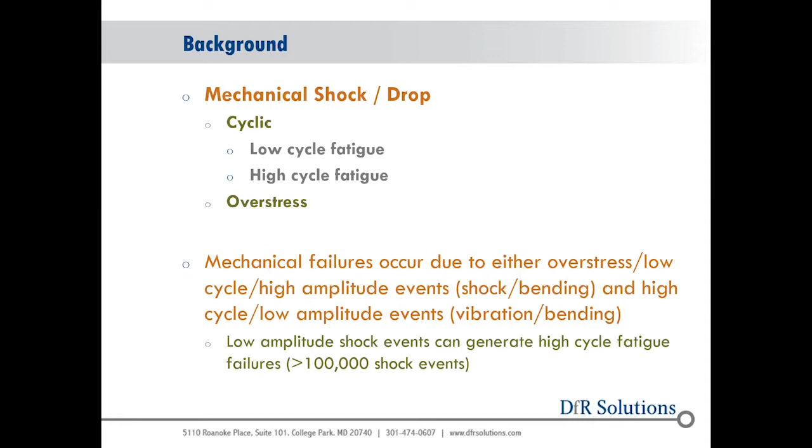So low amplitude events, we want to see elastic type of deformations, and then we're talking about getting into high cycle fatigue, so like 100,000 or more events.

As I said, anytime we hit the yield stress of the solder joints, even the yield stress of the copper leads or any other metals on the circuit board, there's a good chance we're going to break something.

One of the things about electronics is that a lot of the fracture strengths of the materials are all very similar. So ceramic capacitors crack usually between 30 and 60 megapascals, maybe 80 megapascals.

Pad cratering is around the same type of stress level. And then the yield stress of the solder is actually 30 to 50 megapascals. So you can imagine, as soon as I start yielding a solder joint, there's a good chance I'm going to break something.

So low cycle fatigue of the metals usually is going to be the Coffin-Manson equation. And really we're looking at events that occur 100 to 10,000 cycles.

Once you get below 100, it's really - is it an overstress, or, it really gets very difficult to predict very low cycles of failure if it's a bending type of event.

So we're using the Coffin-Manson equation, which is an inelastic strain range. And then for high cycle fatigue, we're using a Basquin equation, which could be elastic strain or stress, because those are directly proportional when we're elastic.

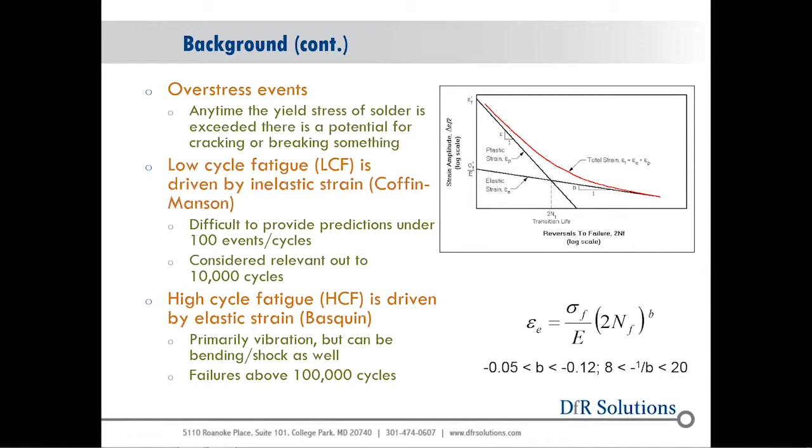Why is it advantageous to do simulations? It's really to catch problems before they're identified in validation and production. So we're trying to identify design issues at the conceptual and design phase, where we can add additional mount points,

we can make the board thicker, we can add stiffeners, we can change component selections, and it really is easy for us to do that earlier, and it's actually a lot cheaper.

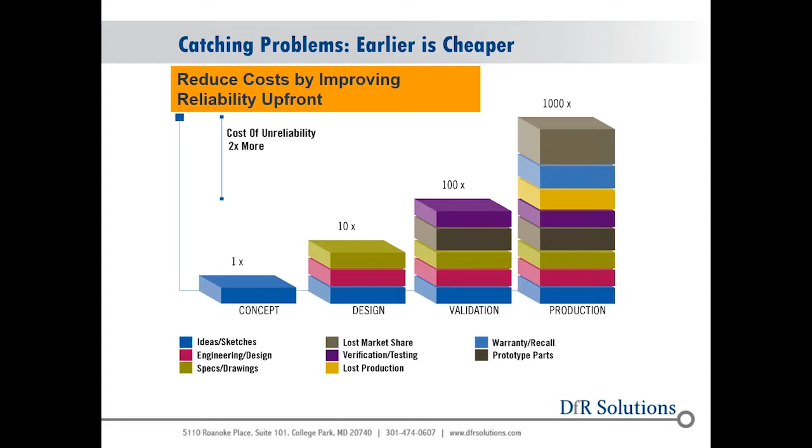So as the product goes through the development cycle, the cost of making design changes or fixing issues becomes very expensive.

The levels of testing for mechanical shock - there's component level testing. These are usually on the loose packages, and typically it would be for the old school hermetic type ceramic packages, where a...

lot of sort of low volume hand soldering type of operations where the part may be dropped, and we're talking about the individual electronic component, and maybe something could get shaken loose inside the part. So really not for most standard overmolded packages.

Component level drop tests are usually not applicable. There has been some indication that dropping tantalum capacitors could have some issues even in the overmolded state.

So then we have assembled package level testing. This is really component package qualification type of testing. This is coupon level testing,

where I solder a new package onto a test coupon. I subject it to a very high shock level, typically 1500 Gs, half milliseconds, really for cell phone types of environments. And then we get to subassembly and assembly level types of drop testing.

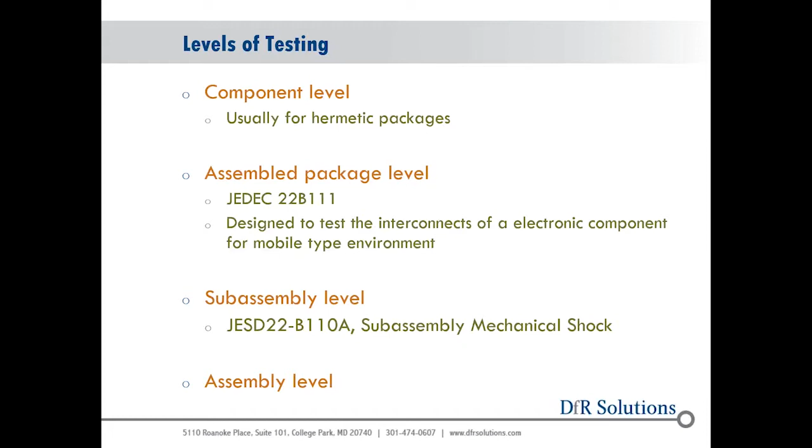When we're talking about overstress, it really is - I mean, yes, you can break the component package, but really it's going to be the interconnect structure. This could be pretty much what's on either side of the solder joint itself.

They're very difficult to predict an overstress failure because it really is a high strain rate type of event, crack propagation through a very brittle material for the most part. And typically we see it as a random failure distribution.

So, if we're at overstress type of levels, the probability of failure on the first drop would be the same as the 100th drop, so a random sort of failure distribution.

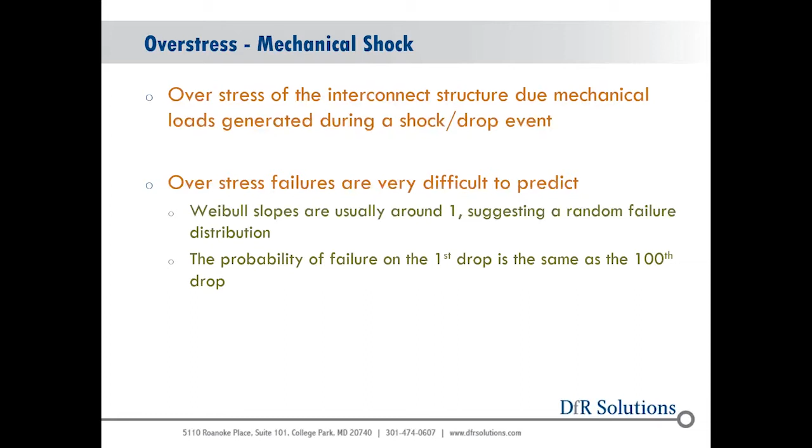When you look at Weibull data for shock drops to failure, the beta is usually 1, which indicates sort of random failure. When we're talking classic mechanical shock simulations, this is usually what comes to mind would be cell phone drop simulation. The key thing is to determine what is the actual loads being applied to the circuit board inside here.

This is sort of where, and it really was with the mobile phone market, when free fall drop test simulations came into vogue, where people started doing a lot of them. But the key thing is, what is it actually doing to the circuit board inside there?

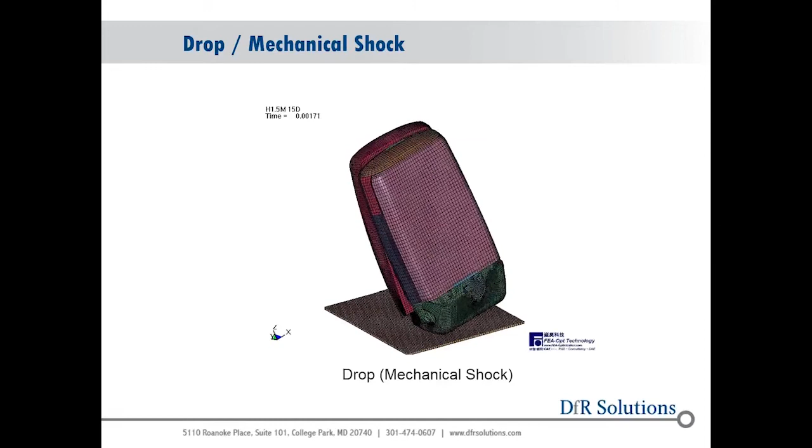We have to remember that mechanical shock events can occur at multiple points during the assembly process or post-assembly. It could be after soldering, or in ICT, in circuit test, where you have a bunch of pogo pins that are pneumatically actuated that push down on the board very rapidly, providing a lot of force onto the board. It could be heatsink attachment, connector insertion, depaneling. We see a lot of bending, or it's not a drop, but it is a very rapid application of mechanical stress, and that can cause failures of the electronics.

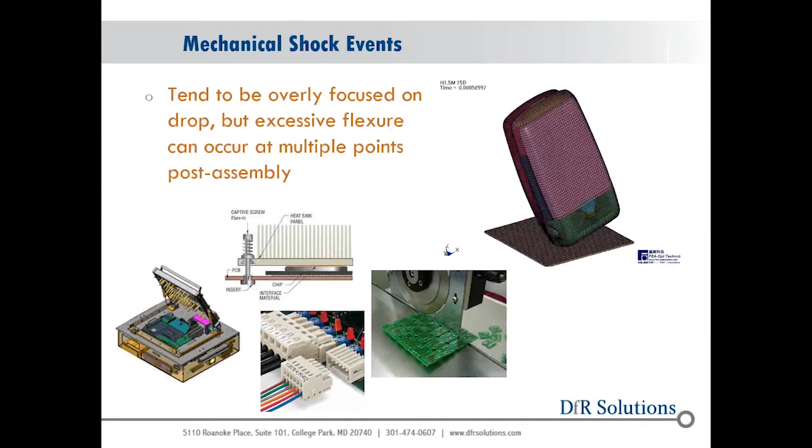Another thing that is very similar to mechanical shock is just excessive flexure. Everybody's sort of making a big deal about bending of cell phones and things like that. So what we're seeing is there's been a lot of 4-point bend testing, to test to make sure the packages are robust with regards to mechanical shock, because it's a very high strain rate 4-point bend test.

And then we also see more adoption of what we call a 9-point bend test. We have 8 spherical supports and then a center point. Again, all mostly for mobile phones or mobile electronics.

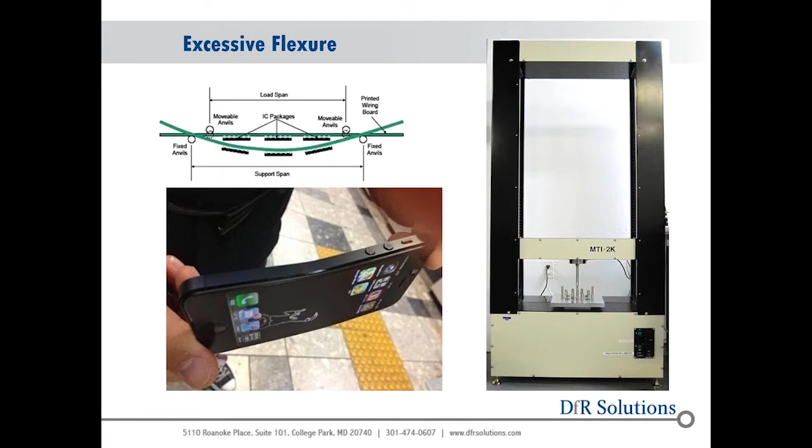But classic mechanical shock was due to shipping and transportation. It's things going onto trucks, being dropped by the UPS guy, kicked around. But we're also seeing mechanical shock due to, in portable medical devices, or really anything that's sort of roller-mounted test equipment. What we saw were fairly decent shock levels developed when they went over thresholds - floor transitions, cable covers, going into an elevator that's not quite aligned. You could get a 1-inch drop fairly easily going over a cable cover, and that could result in failures or heat sinks shaking loose.

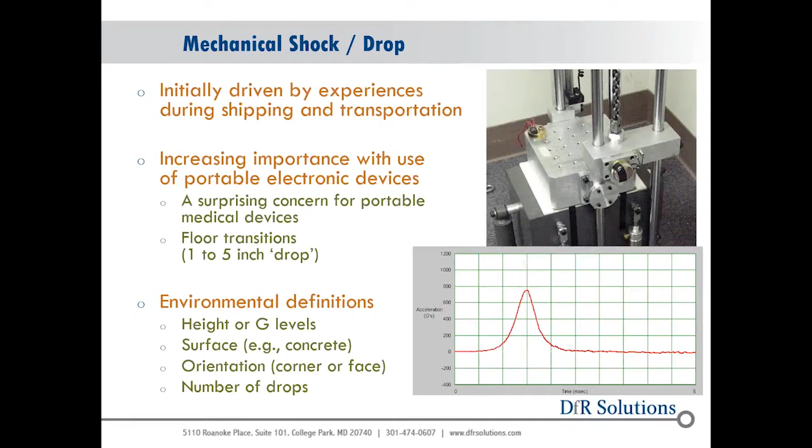Environmental definitions usually include height or G level, what type of surface, orientation of the drop, and the number of drops that needs to survive.

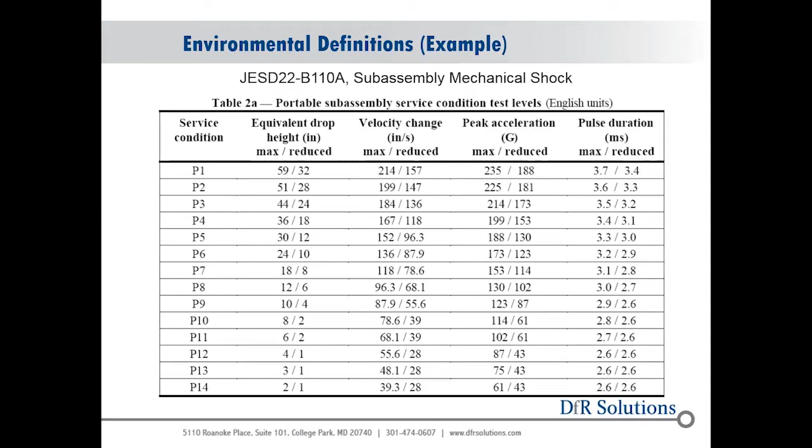Just an example of some of the specs for test service condition test levels from JESD 22B110. Really, it's equivalent drop height, what's the peak acceleration, and what's the pulse duration. These are all things - peak acceleration and pulse duration are easily translated into a load, something I can actually figure out. But telling me I'm going to drop this from 44 inches, what's the equivalent G level? It really depends on what the housing is, what it's attached to, how the board's attached, what it's hitting. So really, when you come down to mechanical shock specs, I like to see acceleration and time because I know how to simulate those.

Typically, what we're looking at, a good example is BGAs, really would be probably the most common component that shows shock-related failure.

Most of these parts, it really isn't the mass of the component itself - yes, it can be if there's a big heat sink on it, but usually it's board bending. We don't really care about the mass of the part. If I shock the component in plane, the package wants to move with respect to the PCB sort of in a shear direction, there's a lot of solder attached, so really in the shear direction we don't really see any issues. It really is more of a bending event when you get a peeling stress at the corners, which exerts a large tensile load on the solder joint, which can cause it to fracture at the brittle interfaces.

When we're looking at the brittle interfaces, we're not talking about failures in the solder ball itself. We're talking about fractures at the intermetallics, which are on both the package and the PCB side, and we're talking about pad cratering - pulling out, actually breaking the epoxy where the copper is attached to the board. Those are overstress types of conditions, and you wouldn't expect to see those at 100,000 types of events. You're going to see these very low cycle, large acceleration type of events, and you're going to cause a brittle fracture where a crack can propagate very quickly through these brittle materials and cause a failure.

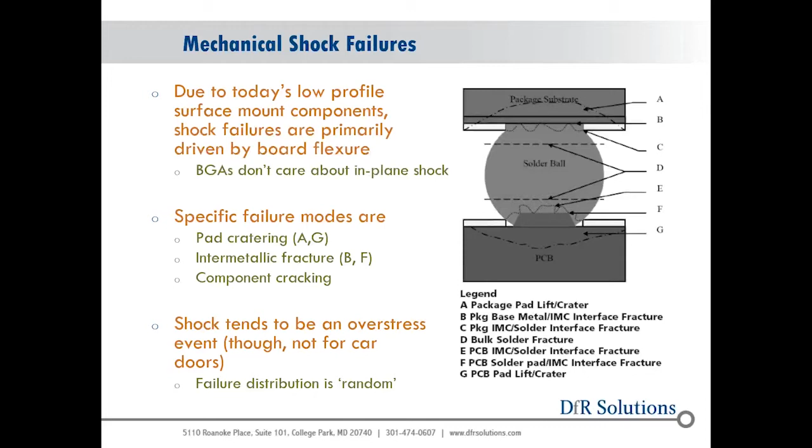What do they look like? So we have an intermetallic fracture here on the top. You can see the crack. Now intermetallics are normal. They're how the solder bonds to the printed circuit board, or to the copper. In this case, looks like we have a nickel layer up here, and we have a copper intermetallic down here.

So this would be a tin nickel intermetallic on the top, a tin copper intermetallic on the bottom. The intermetallics themselves are fairly stiff, high modulus with respect to the solder, and very brittle. So under an overstress condition, they're not going to plastically deform. You're going to get a brittle crack, and it's just going to propagate very quickly through that interface.

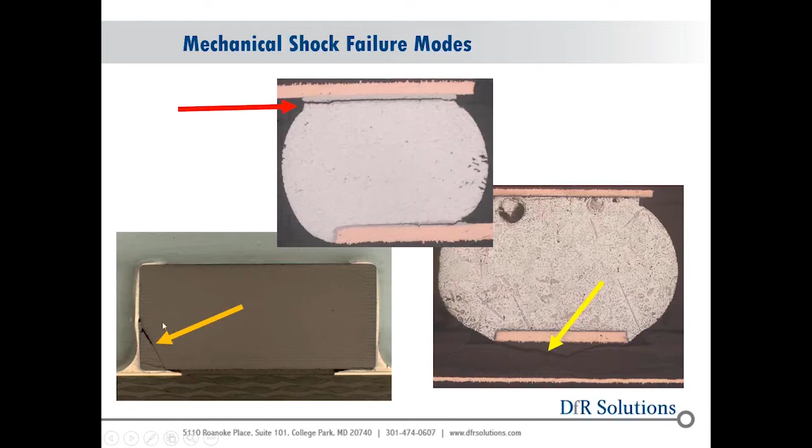Same thing down here. Really, stress is a function of cross-sectional area. So when I have a very small copper pad, and I'm pulling this part, I'm going to have a very large tensile stress in my circuit board, and I can actually pull the circuit board apart underneath the copper. Ceramic capacitor cracking here is just an example of a board bending event due to shock that cracked a ceramic cap.

Just definitions of pad cratering. It's crack initiation within the laminate during a mechanical event, such as ICT, and we talked about board depanelization, connector insertion, shock and drop. So that's pretty much the definition of a pad crater.

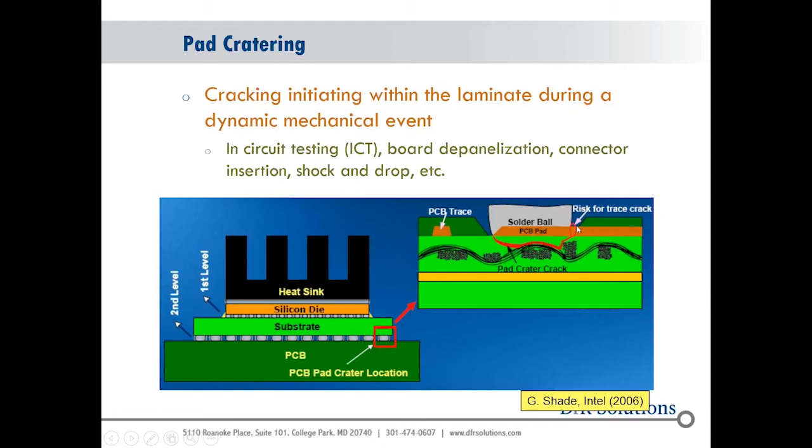The thing about pad cratering is it's one of these failures that you may not see during electrical test. What will happen is if the trace doesn't crack here, this is still electrically functional. So what you're doing is letting escapes into the field where there's not much holding that solder joint onto the board except for a very small portion of copper, which could break under a little bit more mechanical load.

Just some more pictures of it. We also saw a little bit of an uptick in pad cratering when we went to lead-free because of the stiffer solder, and a lot of the laminates, we had to go with higher glass transition temperature laminates. They tended to be a little bit more brittle than the typical laminates we were using before.

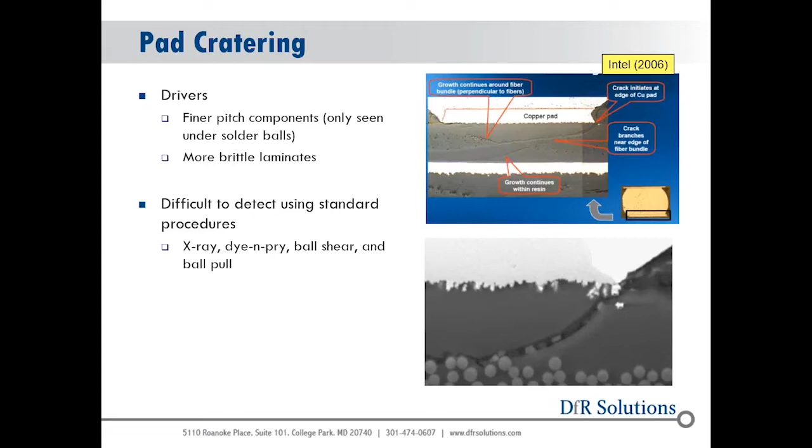And it really is very difficult to detect. As I said, it's very hard to see it with an X-ray. Really, to pick it up, you're going to have to do dye and pry or some destructive technique in order to determine whether or not you have pad cratering occurring. Usually what happens is you have an electrical failure after some assembly process or some drop event, and you go into destructive analysis right away.

Some of the solutions, it may be using a different type of laminate, so doing some type of testing on the laminates themselves, doing design changes on the pads, making the copper pads larger, and using solder mask defined. That would, there's kind of a trade-off there. If you make the copper pad bigger, you're spreading the stress out or the force out over a larger area and reducing the stress. But by going to solder mask defined, you're actually increasing the stress on the intermetallic. So there's kind of a trade-off. The thing is they break around the same stress values.

So when you do a drop test or shock test, you'll see mixed mode. You'll see intermetallic fractures. You'll see bond pad cratering sort of all mixed together. But really what we're looking at for sort of mitigation of pad cratering is limiting the amount of strain on your board during assembly.

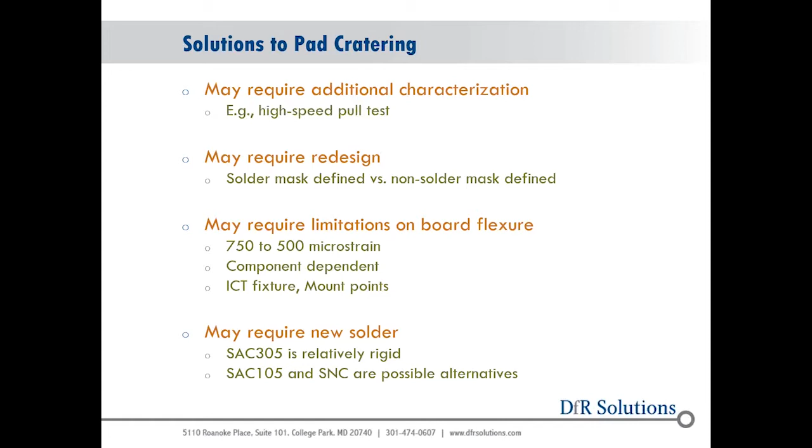During ICT, you may have to add mount points. You may consider going to a different solder, but my opinion is that if I have a shock problem with SAC 305, yes, switching to a SAC 105 or an SNC or SN100 or a SAC M may get me a little bit of margin, but I still have a problem, and I'm still going to have failures. There's just not enough. Yeah, there's a little bit, but there's just not enough to eliminate the issue. It may be a combination of solder changes with additional mounting to mitigate it.

Intermetallic fractures, it's a fracture through the intermetallic. They're typically an overstress. We wouldn't really see this during low cycle or high cycle fatigue. What we see with high cycle and low cycle fatigue are cracks in the bulk of the solder.

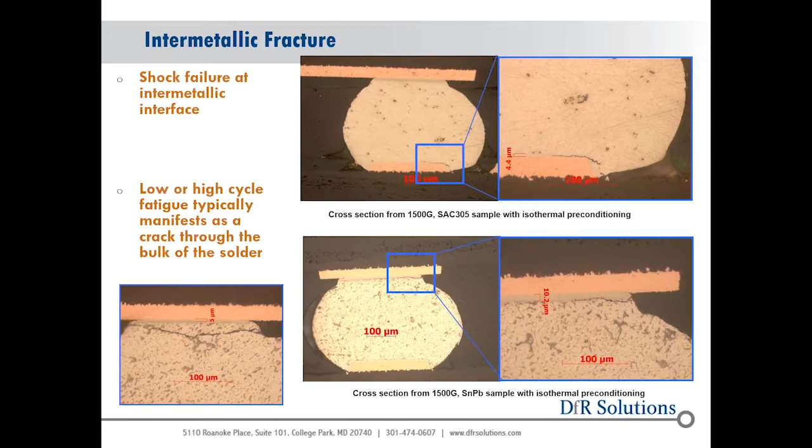So if you start to see cracks like this in the intermetallic on a unit, and you try to convince yourself that this is vibration or low cycle fatigue, chances are it's not. It's somebody dropped the unit or did something to it.

And the intermetallics are there all the time. They're irreversible. They're a function of how the solder is held together to the copper. It occurs rapidly during reflow, but it still grows as the solder joint ages. And just some guidelines on how thick it should be.

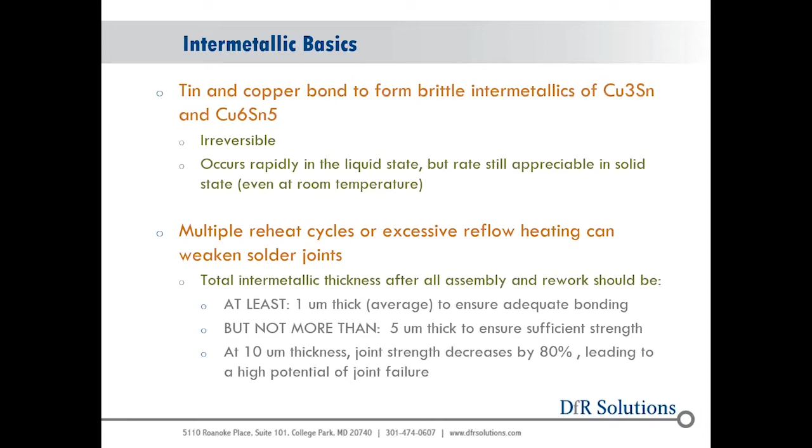As the intermetallic layer gets thicker, if you look at this chart or these pictures of tin copper intermetallic growth, imagine a crack propagating through the intermetallic in the lower left corner. As it propagates, it's going to hit ductile solder regions and get arrested, having to work its way through the plastic material before it hits the brittle material again. That slows it down and makes it more robust. But as I grow that layer thicker, I get a very uniform intermetallic structure where the crack can just zip right through it and break. That's one theory, in fact one of my colleagues at the University of Maryland came up with it.

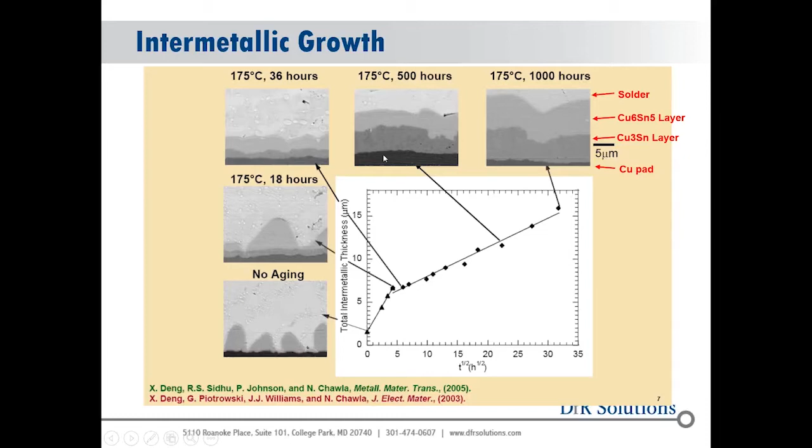Now, why is there such a large difference in strength between a very thick intermetallic versus one that's spiky, like a mountain range? The crack cannot propagate without hitting a ductile material.

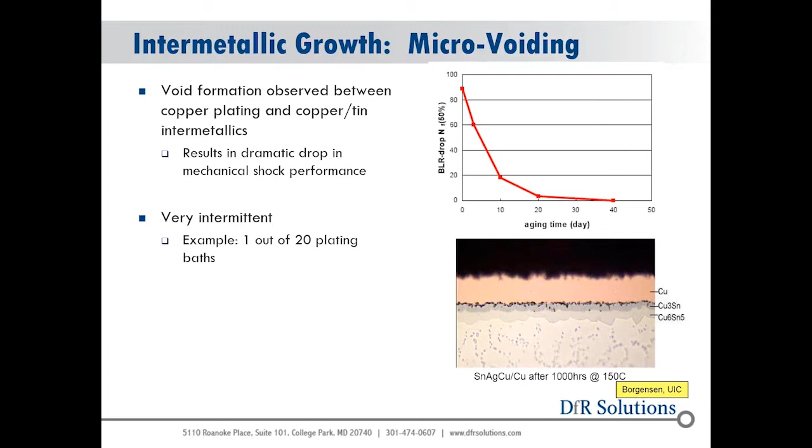Another issue that can reduce strength during shock is Kirkendall voiding or microvoiding. Kirkendall voiding is due to excessive intermetallic growth. This type of microvoiding is more of an effect of organic contaminants in the copper plating solution, and they've pretty much figured out how to get rid of that.

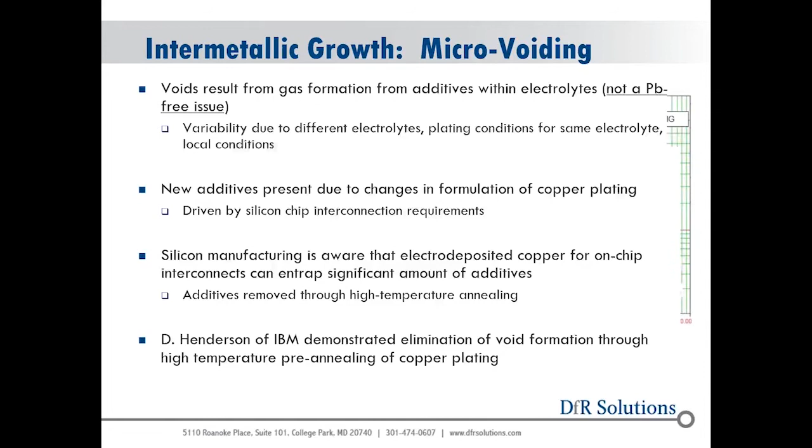Not something we've seen recently, but during the lead-free transition, people were looking for reasons why lead-free boards were failing. They did cross-sectioning and saw these microvoids, but then they did cross-sectioning on tin-lead product and saw the same microvoids, so it wasn't really a function of lead-free. But again, any type of voids at the interface or in the intermetallics reduces the cross-sectional area of the attach and increases the stress, which can cause earlier failures during the shock event.

As I was saying earlier, there's tin copper intermetallics and tin nickel intermetallics. Electroless nickel immersion gold, ENIG, is the gold finish on your boards, just a very thin layer of gold over nickel. The standard intermetallic form for that would be tin nickel. For other board finishes, such as OSP, immersion tin, immersion silver, or HASL, you're going to be forming copper tin intermetallics.

As we can see on this chart on the right, the number of drops to failure for the copper tin intermetallics is quite significantly higher. So if you're going into a high shock level environment, you may be better off going with the OSP or HASL type of finish because you're getting a stronger intermetallic.

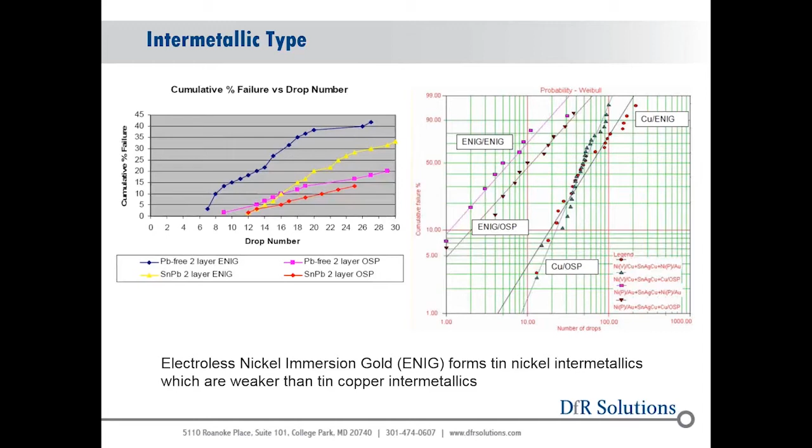The other thing though is ENIG is really good for elevated temperature applications, because at higher temperatures the tin nickel intermetallic grows quite a bit slower than the tin copper intermetallic, so it's usually better for high temperature applications. There are things you have to consider about all the different board finishes and how they impact the shock robustness of the product.

Definitely a thing of concern with lead-free is that it's a stiffer solder. It puts more stress on the interconnects, therefore it has a weaker result, its number of drops to failure is typically lower. This is a good example: you have the yellow line, which is tin-lead, and then your standard SAC305 here on the left. There's a significant reduction in drops to failure because of intermetallic fracture and pad cratering.

Because the yield stress of SAC is much higher, the solder doesn't deform and absorb the stress.

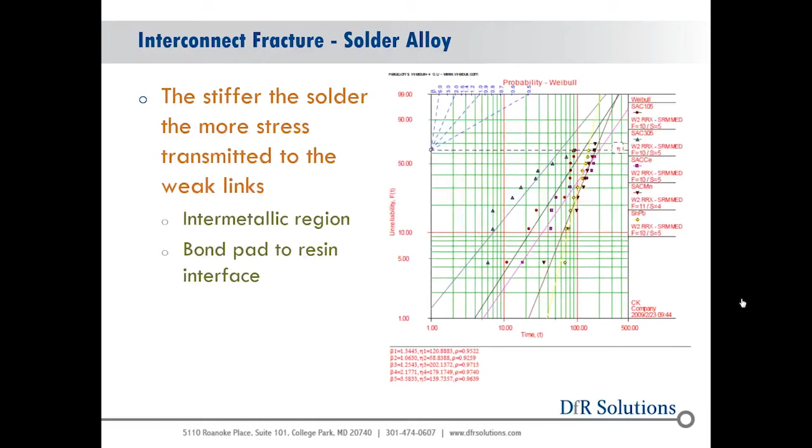How to mitigate for pad cratering or intermetallic fracture during shock. We talked about, and we'll go into some simulation later on, the effect of mount points and board thickness. Here we're looking at things I can do outside the design itself, like corner staking, edge bonding, underfill, and how they affect shock robustness.

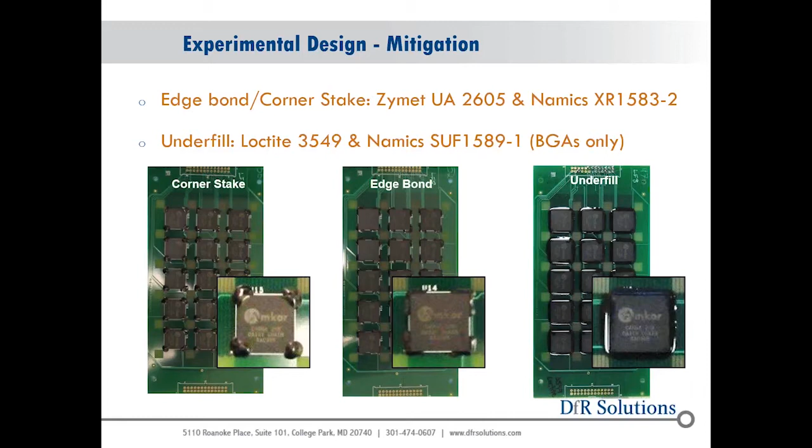These are cases where, hey, I've got an existing board, I can't do anything about mounting, I can't really change the form factor of the circuit board. Is there something I can do if I've got a part that's failing, to prevent that? Just some different loading conditions.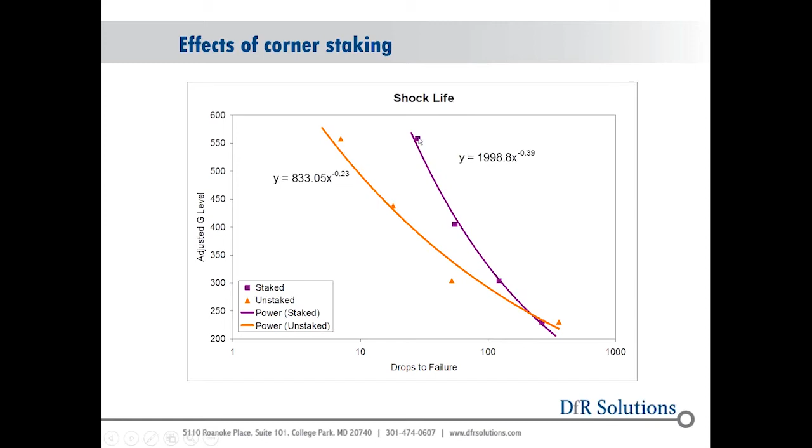We're starting to get into low cycle fatigue type of action above 100 cycles, but definitely time to first failure improved. And really, is somebody going to drop it more than 10 times? Hopefully not. But adding a little bit of staking will get you a little bit of margin.

When we go to a larger volume of staking, these are those 3 coupons I showed. We have our tin lead, which is the green line. We have some lead-free SAC 305, SN100, and then we have 2 different corner stakes, a UA 2605 and a 1583. So yes, there's a function of the corner staking material. But you can see all these now are very close.

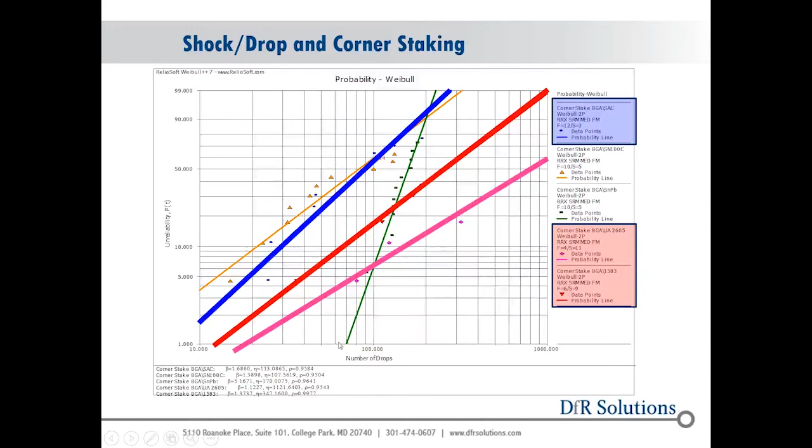Looks like there was one early failure here on the red, but definitely purple - there's only 3 failures. In fact, you can see there's quite a bit of number of suspensions here. So definitely the corner staking had a significant impact on drops to failure here, where we were getting drops within 20 cycles. Now we're starting to get drops 70 to 100 before we see the first failure.

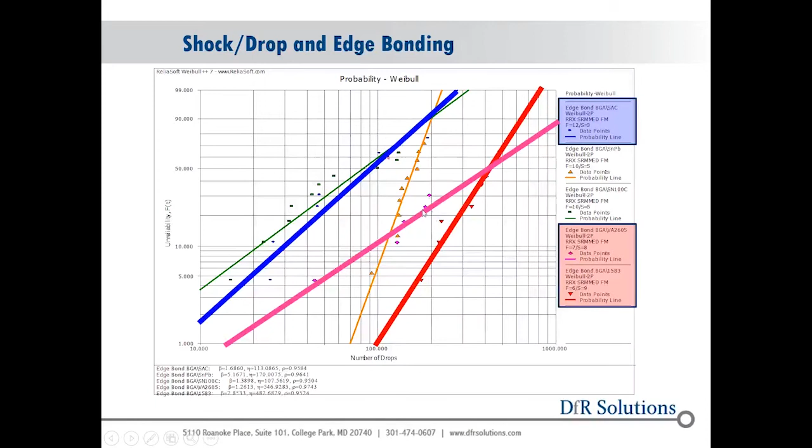Adding a little bit more epoxy, call it doing an edge bond, which is doing a sort of an L around the corner - again, now you're seeing more of an effect. Is that the 1583? Okay, the 1583 is actually performing better than the tin lead. This material probably needs to be a little bit harder, it's probably still a little bit too soft, but it's still performing better. But now when we get to underfill, we have 0 failures for the underfill device.

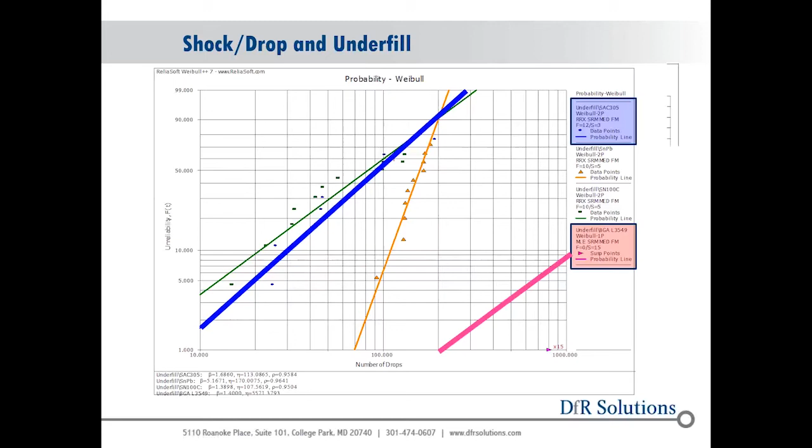So you can see just a huge impact using underfill. Now, underfill is great for vibration and mechanical shock, but you have to make sure when you're selecting an underfill, especially, typically what we're seeing is if I'm putting my product into an environment that has high shock levels and high vibration levels, it probably also has high temperature changes or thermal cycling criteria. So you just have to make sure that whatever underfill you pick, and to some extent this goes to edge bonding and the corner stakes also, you want to make sure that that underfill or staking compound is compatible with the temperature ranges that you're using and doesn't actually cause a problem when it comes to thermal cycling.

When we get to simulation and prediction of mechanical shock failures, we're going to start with the old school technique using Steinberg methodology for predicting number of shocks and drops to failure. Really, it was more of a go, no-go type criteria, based on displacements, which when you think about it really makes sense, because as soon as I get into a low cycle fatigue type of behavior with a shock event, there's a good chance that I'm going to break something due to overstress, because the yield stress of solder is close to the breaking stress for a lot of these materials. So I like the go, no-go approach.

But this is an older technique and really is based on displacement, and we know that surface mount components are really more sensitive to strain or bending of the circuit board. So this is an example - this is IPC 9704, which had a strain. How fast was the strain being applied, and then the board thickness, and what's the permissible strain that I could subject that component to, mostly for BGAs.

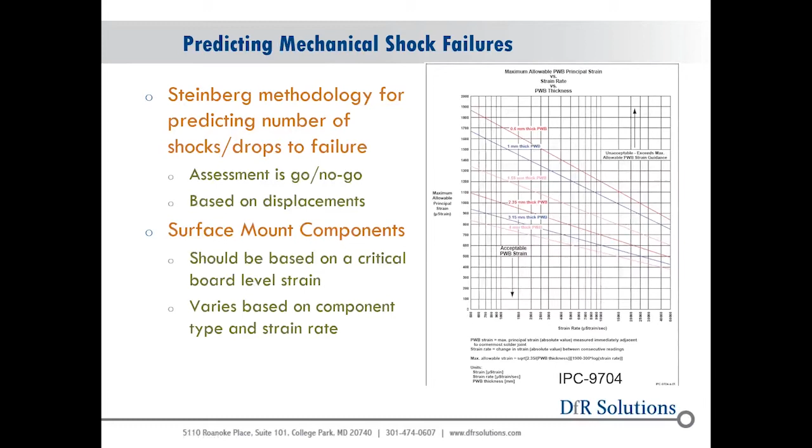So if we look at the prediction for Steinberg for shock, now it's not straightforward. It is a fairly complex calculation, because you have to predict - you compute out the Z, I should put some subscripts on here. There's a Z critical, that is the critical displacement which I don't want to exceed, because if I exceed it, I'm going to have a failure. And it was just an empirical equation that I'm showing here: 0.00132 times the board length, a component factor.

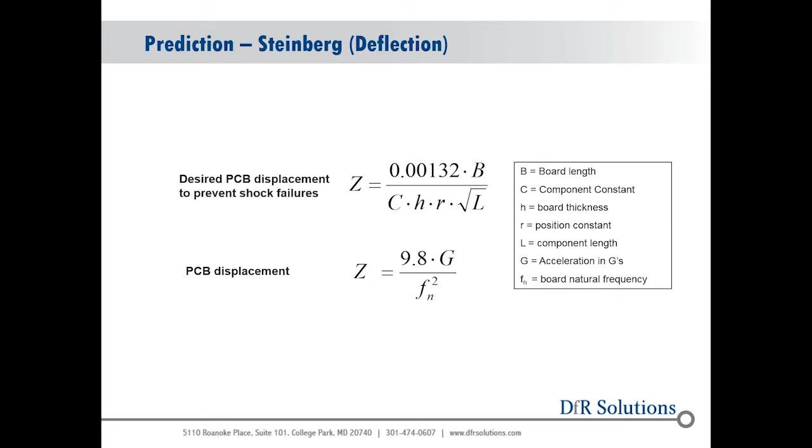The thickness of the board, position constant, and again, we're assuming that the board shape during the shock event follows usually a sine cosine type of function, and then the square root of the component length. And then the printed circuit board displacement during the shock event is this equation. It's a function of the natural frequency, because the board natural frequency is sort of an indicator of how stiff that board is, the G level and 9.8. However, how much G level is actually effective on that printed circuit board is dependent on the natural frequency of not only the board, but also what is the frequency of the shock pulse itself.

There's a table in Steinberg's book, and I'd definitely recommend anybody interested in shock and vibration have a copy of that book. What I have to do is modify the G level based on the pulse duration and the natural frequency of the board using what we call a frequency ratio. There's a graphical chart or table you have to look up in order to modify that G level.

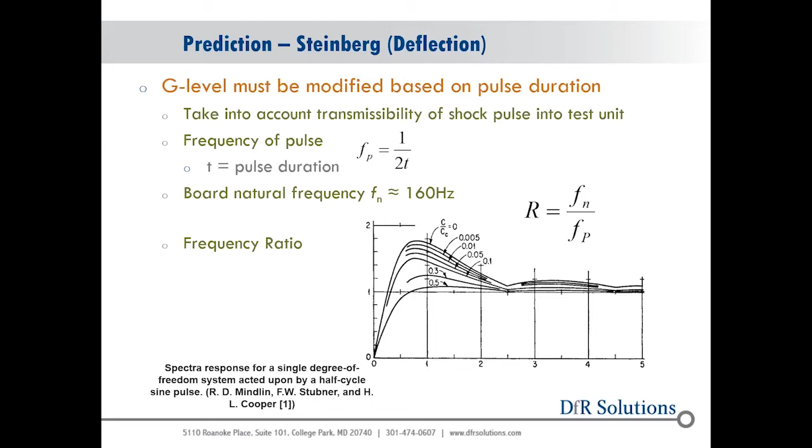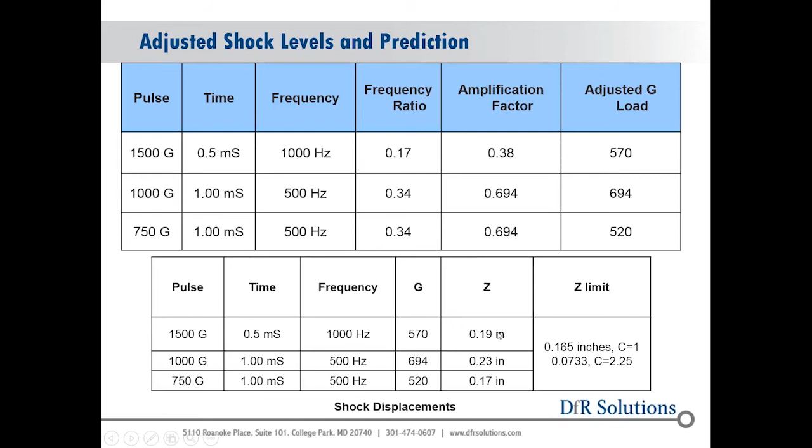Again, that would be just for the center component. The components farther away from the center are going to have a lower displacement, so chances are they may be shown as passing.

But really what we need to do for BGA devices and low profile QFN devices is know what the board level strain or how much bending that device is being subjected to. When we're talking FEA simulations, we're talking a transient dynamic simulation. We typically, for speed, use what we call implicit transient dynamic. The example I showed earlier of the cell phone drop is an example of an explicit transient dynamic simulation. Explicit is used when things are hitting each other, or impacting.

What we're talking about for an implicit simulation is the shock level comes in through the mounting points of the board and gets transferred. Now I'm not hitting anything - there's no impact, like a capacitor moving and hitting a wall, or a car crash, or something like that.

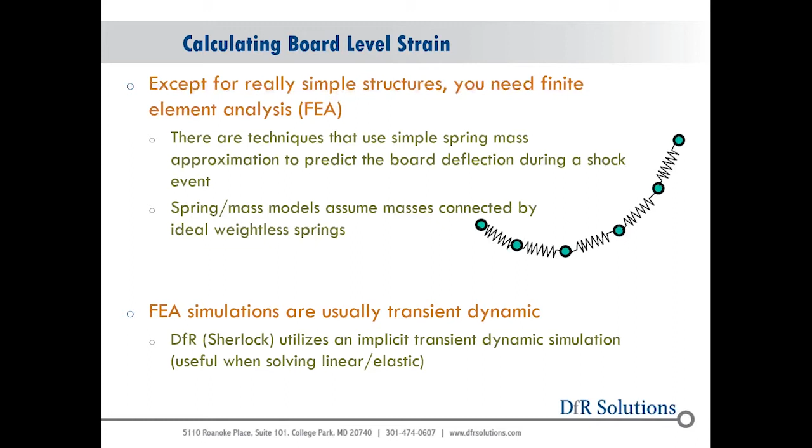But I can still do a curvature-based assessment using Steinberg. This is using a simplified approach, saying the board is bending in a circular shape, and I can convert deflection - there's also equations for a sinusoidal shape. What I do is, based on the deflection and the board span, predict what the curvature is, and the strain at the component is just a function of curvature and board thickness.

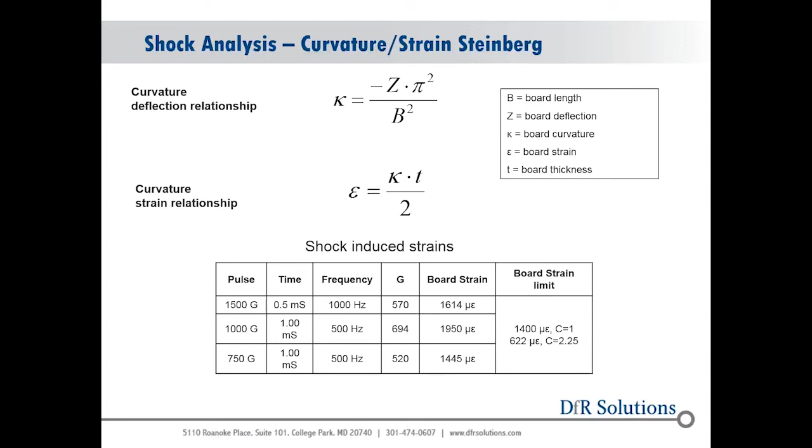Using that type of criteria, we can see the board level strains are above 1,000 microstrain. For a leaded component, I would have a 1,400 microstrain type of limit. For a BGA, it would be about 622 microstrain. If you're familiar with some of the guidelines coming out for BGA devices during depaneling and ICT, we're usually sitting around 600 to 750 microstrain as a limit for those parts during a shock event. So these numbers are right in the ballpark, saying yeah, we still have a problem.

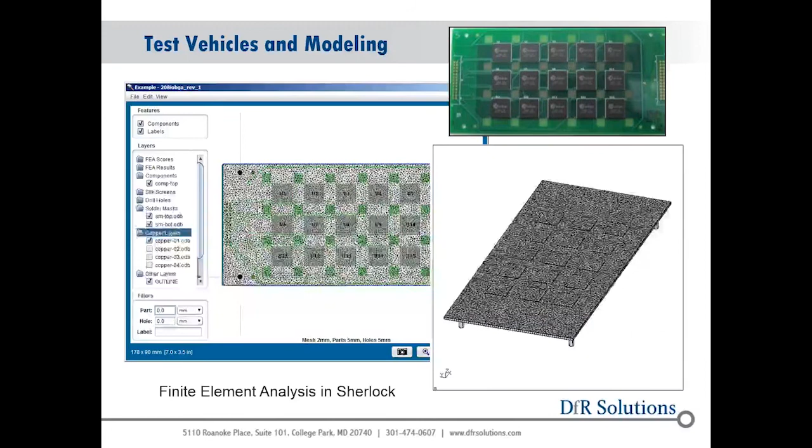The Sherlock software is what we use as a custom pre and post processor for doing mechanical shock simulations. It utilizes an FEA code in the background, either Calculix, ANSYS, or Abaqus, and we're currently working on Nastran support. It's a way to rapidly build up electronic FEA models for electronic assemblies, greatly reducing the time required to make these fairly complex circuit board models.

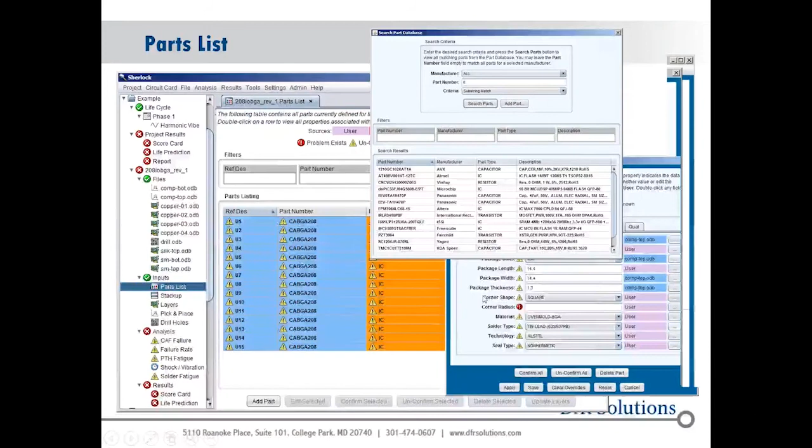We do that with a combination of built-in libraries, either part level or package level materials - you can see overmold BGA, tin lead solder, part parameters - built-in boundary conditions such as standoffs, and a way to input the shock profile very rapidly.

Being a circuit board type of software, we're assuming the shock levels are coming in through the mounting points. So in a free fall drop situation, if the board is screwed to something like a chassis, that chassis hits the ground and transmits the acceleration through the mounting points. Now the board wants to keep moving while the mount points stop - that's the type of simulation. We're not hitting the board with a hammer or dropping a ball onto it; the shock comes in through the boundary conditions for the board.

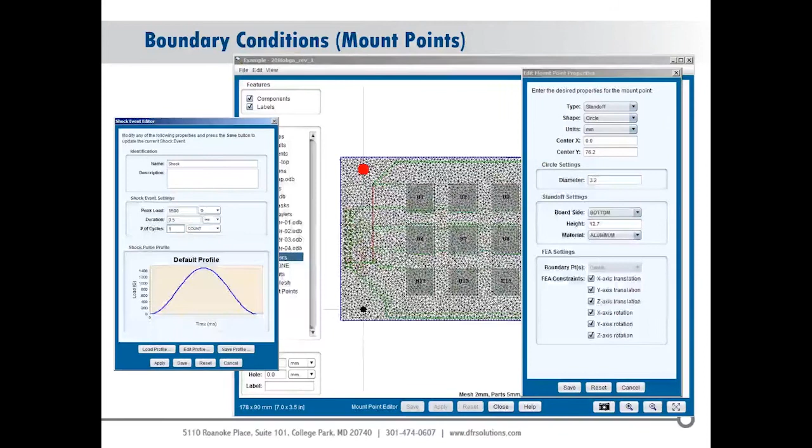We also have a built-in stack-up tool, and there are different levels of detail you can put into the stack-up or how you want to model your circuit board. There's a homogeneous approximation based on copper content and layer thickness, so you come up with effective board properties. But if you have the computational power, you can get all the way down to layer level modeling.

Again, there's some difficulty associated with doing layer level modeling when copper layers are only 18 to 40 microns thick. You're talking about some fairly thin, high aspect ratio finite elements, which can cause an issue.

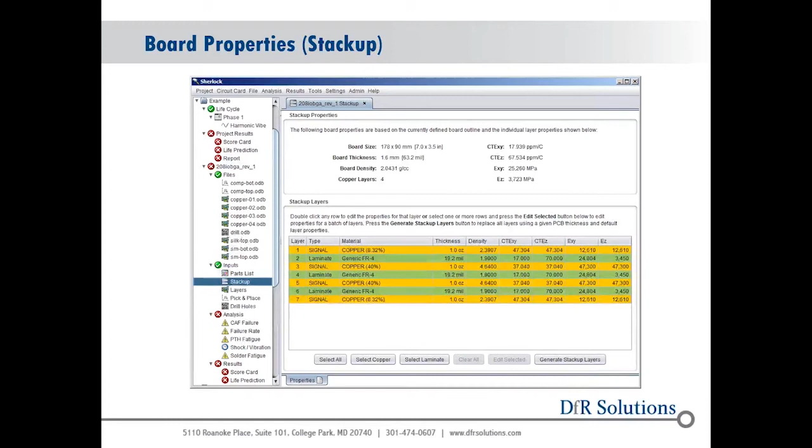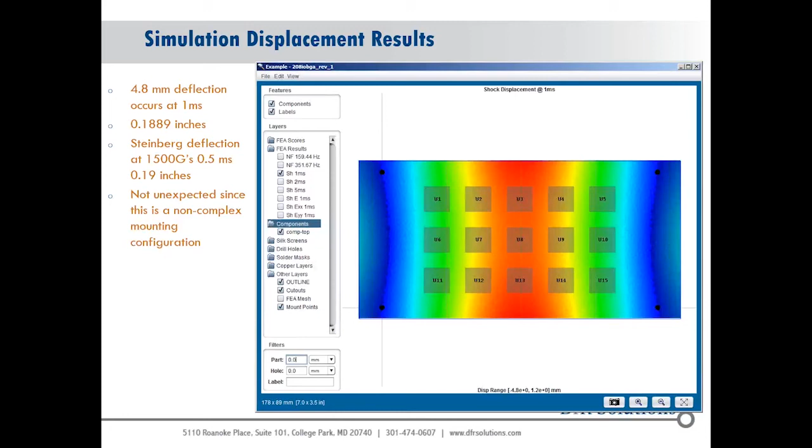But again, here's the difference between a displacement criteria and a strain-based criteria. This is another thing you can think about when laying out a circuit board: am I forming what we call alleys or actually hinges on my circuit board? You can see I've got a large concentration of strain or bending because of the way this board has been laid out. Actually these 9 components in the center have very similar strain levels, so they're all going to have very similar time to failure, drops to failure, because they're being subjected to about the same types of board level strains.

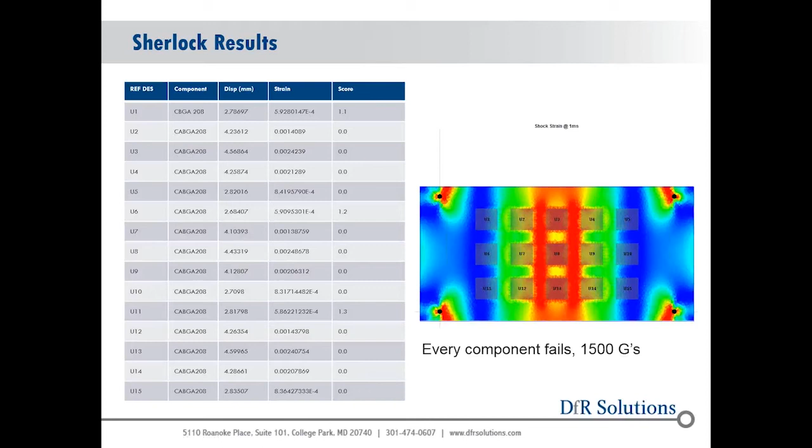And then, where Steinberg wouldn't predict parts failing at lower G's, a strain-based criteria would. The other thing it would also predict is if I had a component next to a standoff where I get a lot of bending, that part would also be flagged as being at risk of a shock failure. So that's one thing where a displacement criteria is just going to miss, and you really should be using a bending criteria.

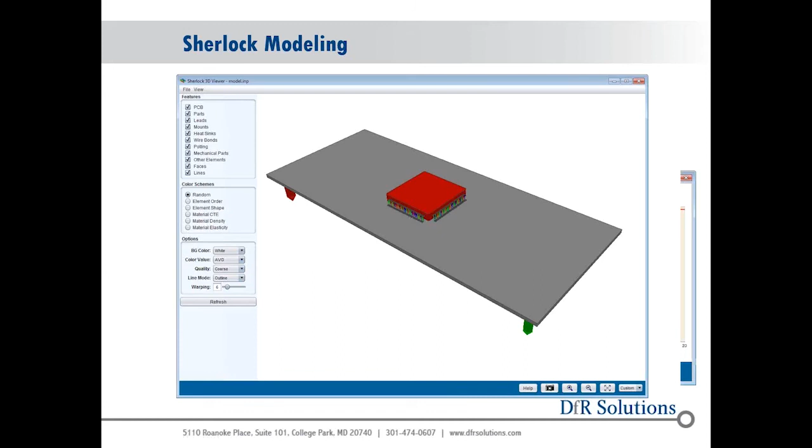I wanted to show some examples of some shock simulations. This is just a simple model of a ceramic quad flat pack. Again, these parts are notorious for having sort of in-plane type of motions. This is the Sherlock simulation showing that part. This is a shock pulse in the X direction of the board, so an in-plane shock pulse that's causing this part to displace to the right. You can see these leads are bending sideways.

We use a combination, again, finite element simulations of electronics are pretty complex, and one of the reasons for that is we have this scaling issue. We've got fairly large circuit boards and then very fine copper features or leads. So you're talking about a circuit board that could be 8 to 12 inches in length, and then leads that could be 150 microns thick. I don't know that in mils off the top of my head.

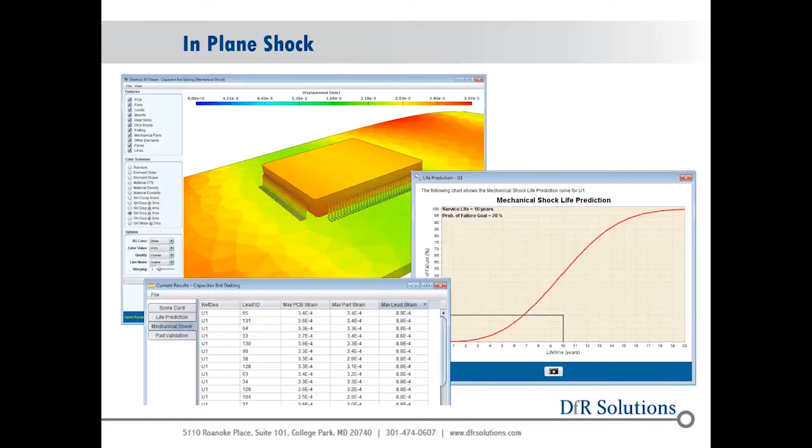That makes it difficult to model, but we use a combination of tied contact surfaces, so I can tie dissimilar meshes together. You can see here as I'm getting the lead strains, the strains in the part, the strains in the leads, and then, because this part is moving back and forth, we actually get a low cycle fatigue prediction for those leads as a function of time. In this particular case, I think it was 100 drops spaced over 10 years. So this is saying, bound, probably going to get about 20% failure after about 70 drops.

Another example of a mitigation strategy, and this would be another common part that we see failing: an electrolytic capacitor, a two-leaded device. Sometimes if they have a little bit of excessive standoff, or they're not supported enough, and they're relatively large mass with fairly thin leads, you will get differential component motion during the shock event. So this part's swaying back and forth.

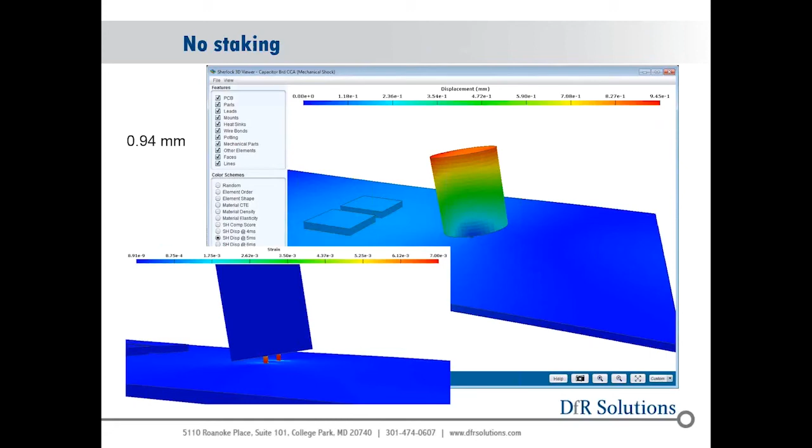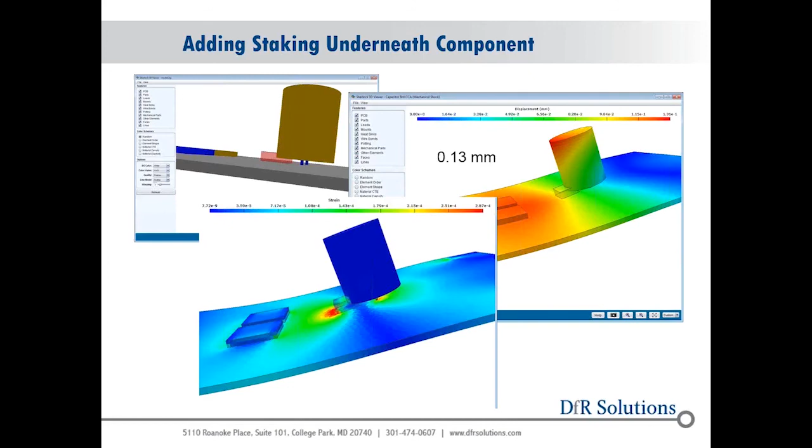With the software action, I can go from about a 0.9 millimeter deflection during the shock event, and by just adding a little bit of staking to one side, I can actually cut that down to a tenth. So where it would fail without staking, it will pass with the staking. That's just an example of how it can show the effect of staking. When somebody asks, well, do I need to, it's an added assembly step, people want to know if it's necessary to prevent a failure. And with this, you can actually show them, yes, I can put staking and prevent the failure.

Additional mounting point considerations. What's the difference having 4 corner mount points versus some other mounting configuration? This is just a simple example.

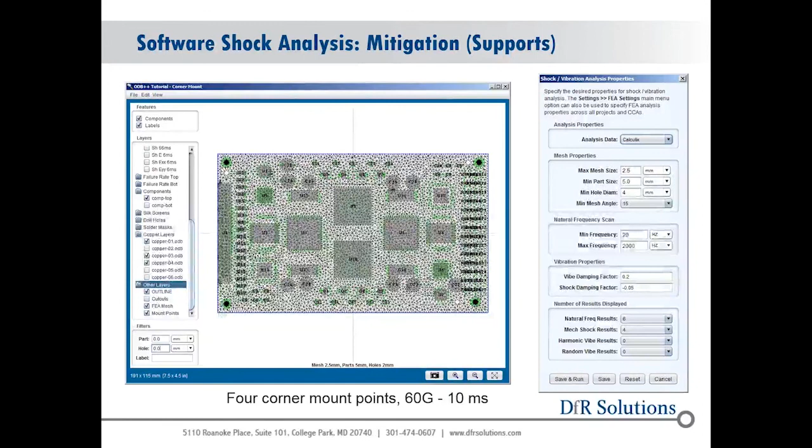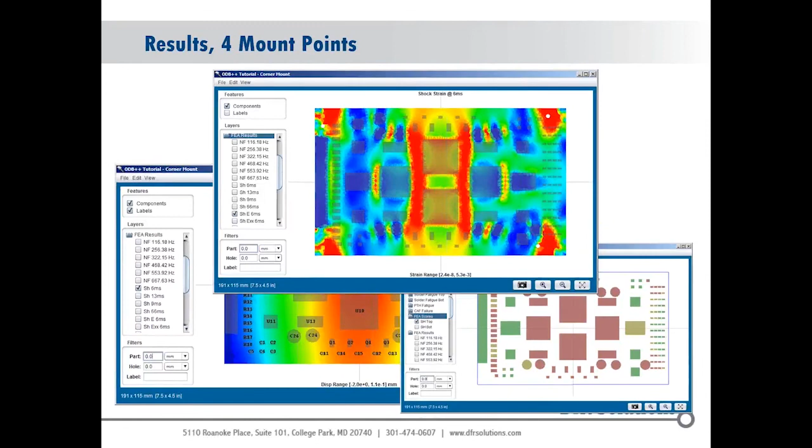But if I add a mount point in the middle, my deflection goes down to about 1 mil versus the 0.1 deflection we had, and we knock it down by almost 2 to 3 orders of magnitude, so I'm no longer getting a lot of deflection. And this board now passes.

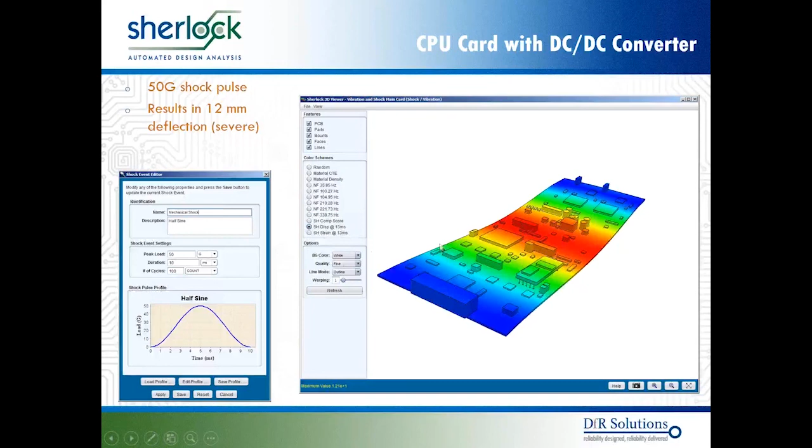A more exaggerated impact of that - this is a very large CPU card with a DC to DC converter mounted to it right there. You can see its natural frequency is very low, 35 hertz, so it's going to bend a lot. Right now we're getting about 12 millimeters of deflection. Again, you see that effect of having clear spans - wherever there's components, the bending is reduced. It's really when I come off that stiff area and go into the circuit board that I get concentrated bending. You see a lot of failures.

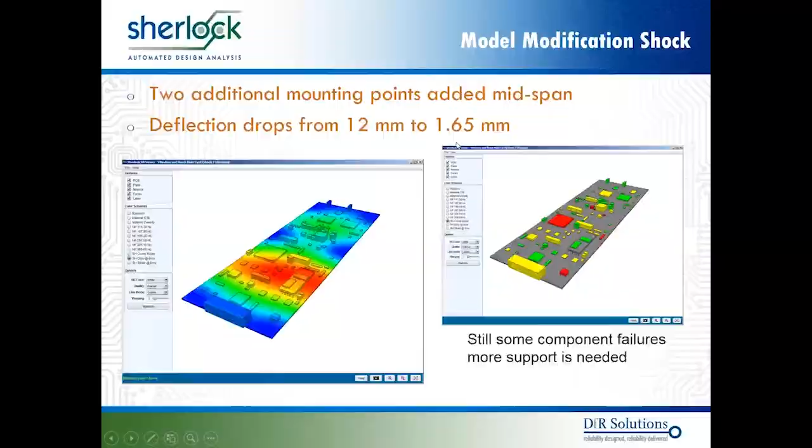But if I add 2 additional mount points - again, this board is about 16 inches long - for this vibration environment, it's still not sufficient to have 6 mounting points. Putting just 2 additional ones in the midspan, I would probably have to do even more. But I did cut down my deflection from 12 millimeters down to 1.65 millimeters. I worked on this - I just wanted to show the effect.

Again, a common question I get is, what happens if I increase my board thickness? As you increase your board thickness, you are adding additional mass to the circuit board. So again, force equals mass times acceleration - if I have a thicker board with higher mass, I'm going to have higher force applied to the board.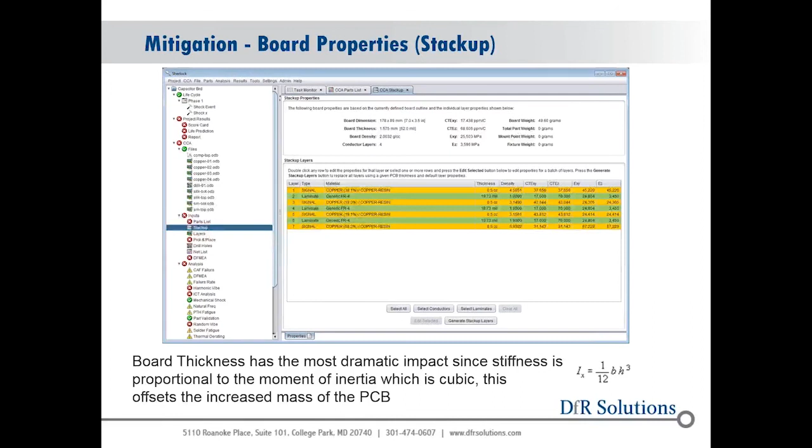But on the flip side, the stiffness of the circuit board is directly proportional to the moment of inertia, and the moment of inertia of that circuit board is a cubic with respect to thickness. So your stiffness is going to increase quite dramatically as I increase the thickness. The question is, will my stiffness outweigh the additional mass that I've added to my circuit board? And the answer is yes.

If we're looking at a 1.5 or 1.6 millimeter thick circuit board, I'm almost getting 1 millimeter displacement. As I get to thicker and thicker boards, my deflection is reduced quite a bit. The one thing I probably should have shown is what that means as a function of strain. I did not put that on here - I'll have to add that for next time I give this talk.

Because again, as you get to a thicker circuit board, for a given displacement, the strain goes up. So I had to double check - definitely we can control the displacement, but got to double check on the strain.

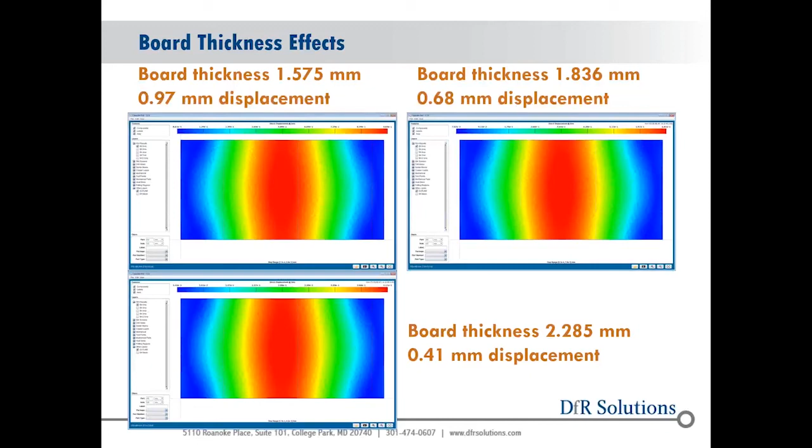But in conclusion, definitely simulation is necessary to capture complex boundary conditions. We're going to have complex mode shapes - the highest deflection may not be at the center of the circuit board. We have to account for the strain at the boundary conditions. When we're looking at these displacement-based techniques, you're making a lot of assumptions, and high displacement is not always indicative of high stress.

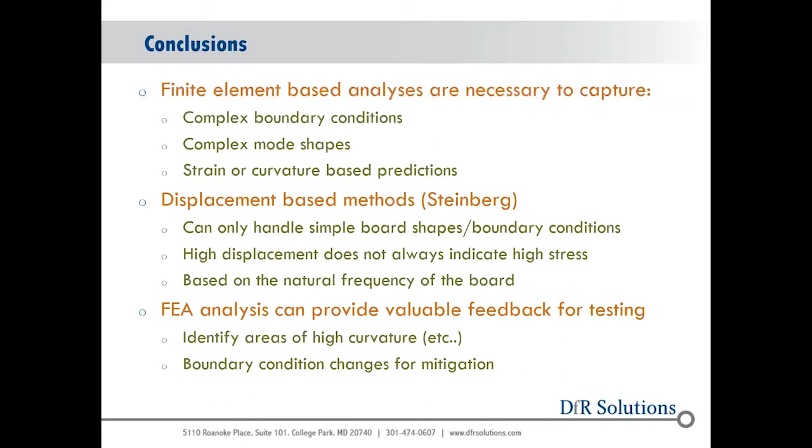And you do still need to know the natural frequency of that board to get good results. The simulations can definitely identify high areas of curvature, as we showed - can you avoid forming these valleys where you're concentrating curvature - looking at the effect of board thickness, the effect of component motion, and the effect of mitigation: staking, adding boundary conditions, things like that you can do with the simulation.